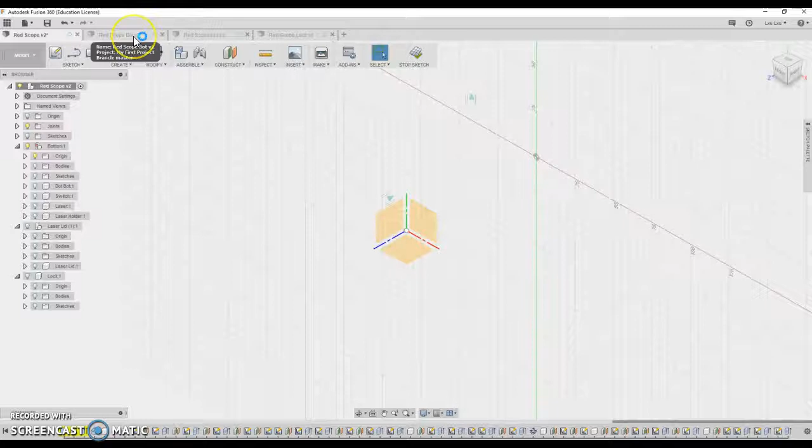It's composed of three components. The first one is the base. It has the basic holder and the shape and the attachment that attaches to the gun. The second component is a lid, which prevents the laser part from falling out. And the third part is a lock that keeps the lid on the body.

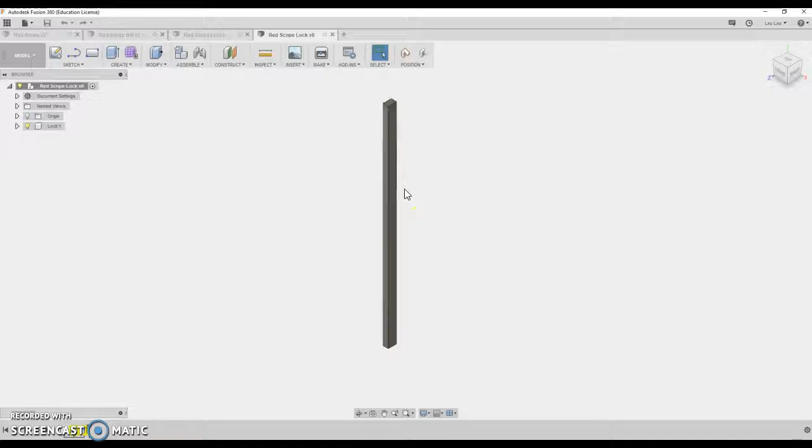So I started with the origin, and then after several sketches that came out of the first body, that's the part that attaches to the Nerf gun. I measured the measurements on the Nerf gun, and I built everything else on top of it.

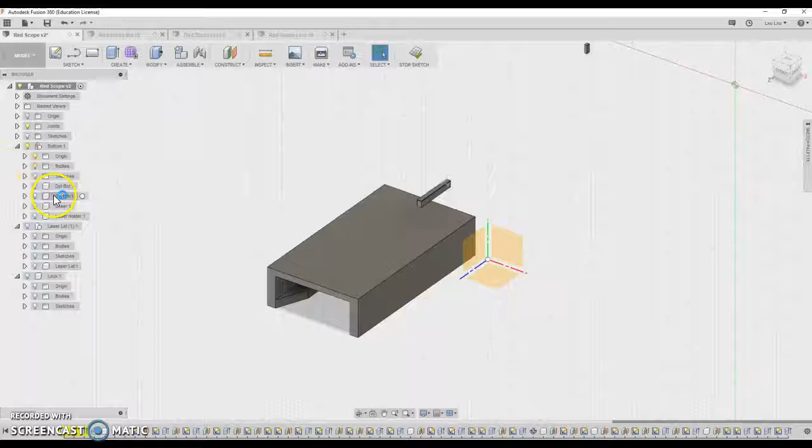After that, I designed this because it looks cool. Basically it uses the circle and then just adds a few parts, including the edges here. After that, because I want it to look cool, I just added a switch.

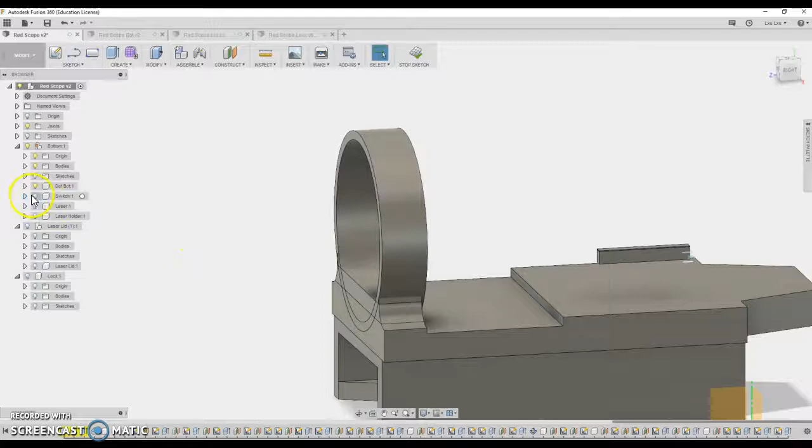To calculate where the laser holder is going to be, I measure the center of the circle, and I create a construction line that leads to where the laser starts. And I created a holder.

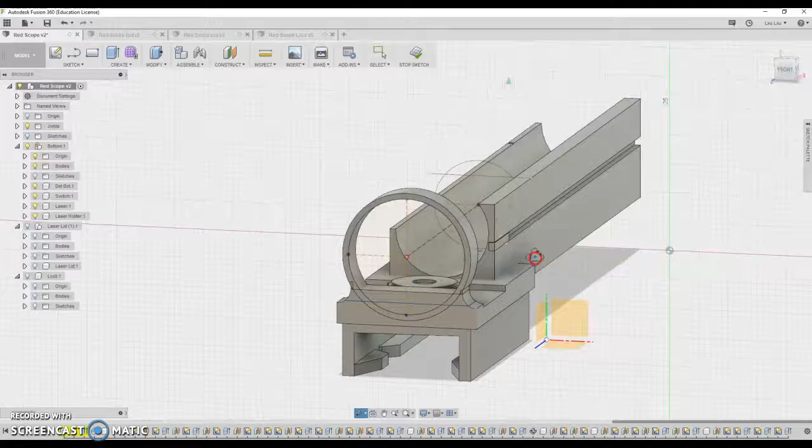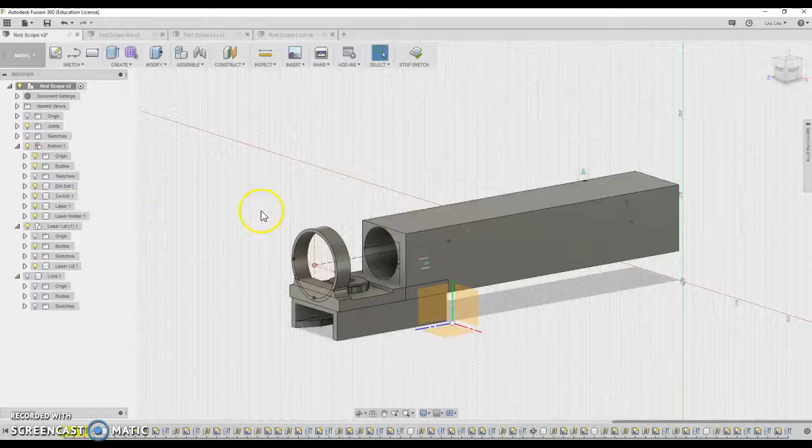So that was the first part of my creation, and now I just have to keep the thing on, so I created a lid. This lid is able to slide on and off. It's long enough to hold the entire laser pointer.

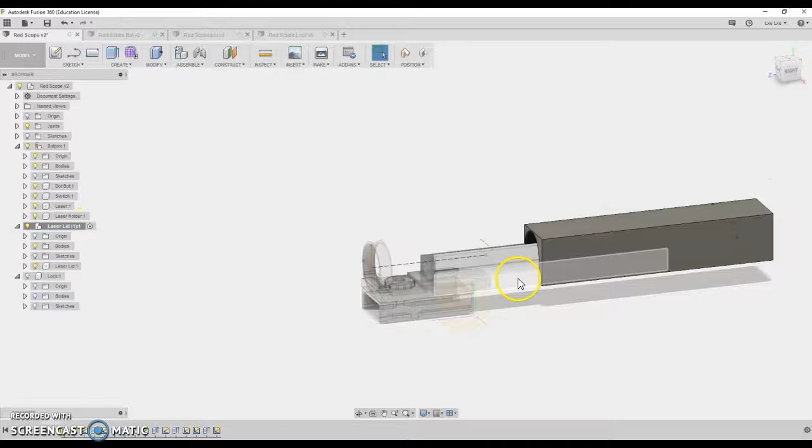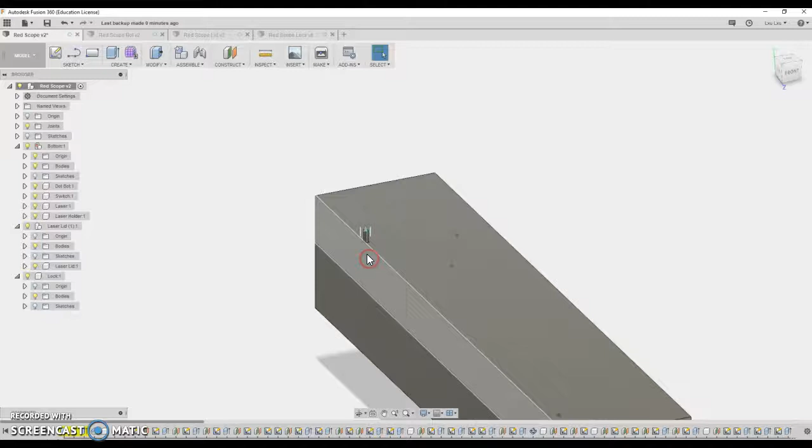And the last part, in order to keep the lid on the bottom part, I created a lock. The lock is basically a little rectangular shaped thing, but it fits inside the hole that connects the two bodies, so it's able to stop them from moving.

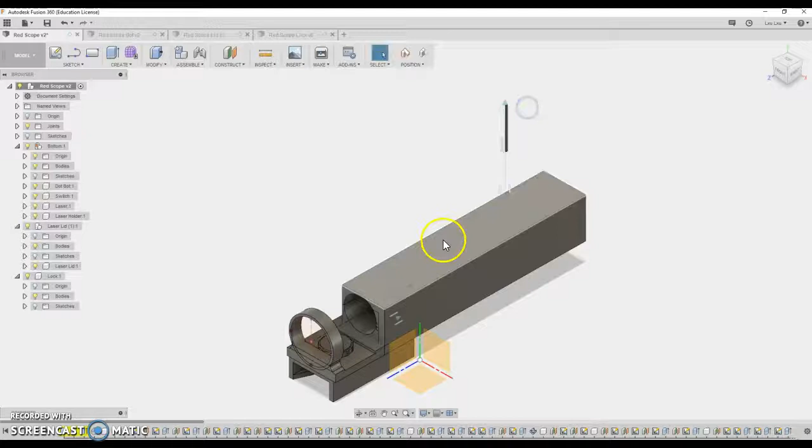So here's my creation. Basically, after it's printed, I have to make three separate prints for the three separate parts. I have to take this one out, slide the lid off, place the holder inside, and just reverse what I did.